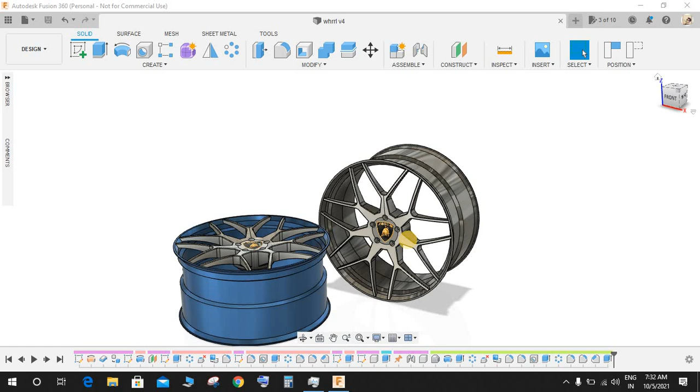In this video tutorial, I will be showing you how to make these beautiful wheels in Fusion 360. Hope you guys will enjoy the video.

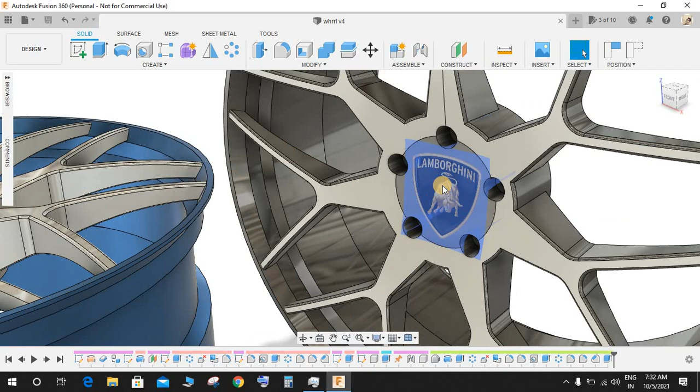Before that, let me make one thing clear: all the dimensions have been assumed, and this is just a practice exercise. I've downloaded a logo, and you can download any logo from Google by typing BMW logo.png or Lamborghini logo.png in PNG format.

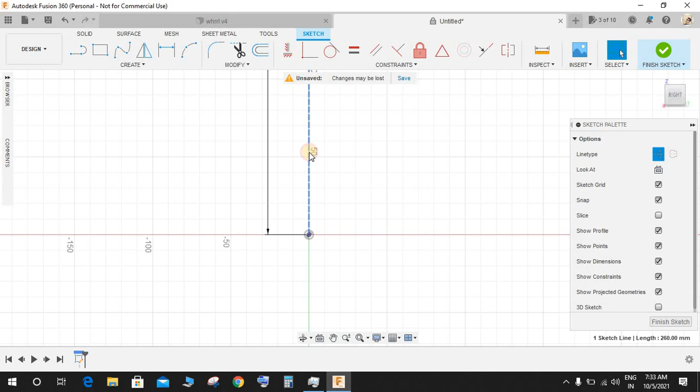Let's get started. Click on front plane and create a sketch. Switch on the construction mode from sketch palette and draw one vertical construction line of 260 mm length like this.

Now press L, switch off the construction mode, and draw one vertical line like this, and from this point another one like this.

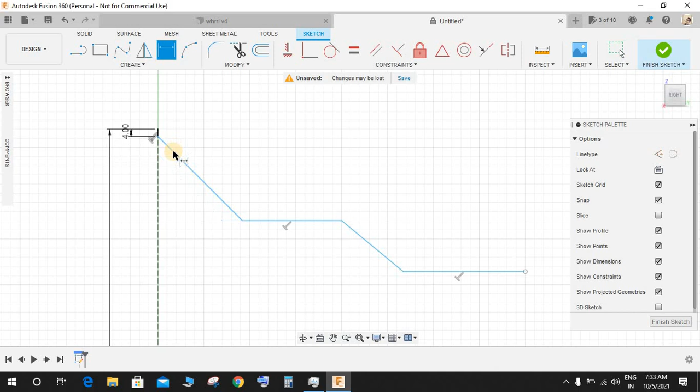Draw this structure, press L for line, press D for dimension, and make this dimension 4 mm. This angle is going to be 60 degrees.

From this point to this point, this dimension is going to be 12. From this point to this point, again 12. This is going to be 20.

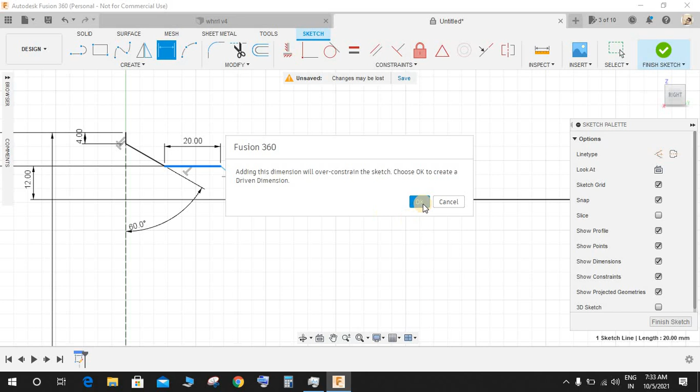For this angle, just delete this, press D again. This angle is going to be 120. This dimension is going to be 80.

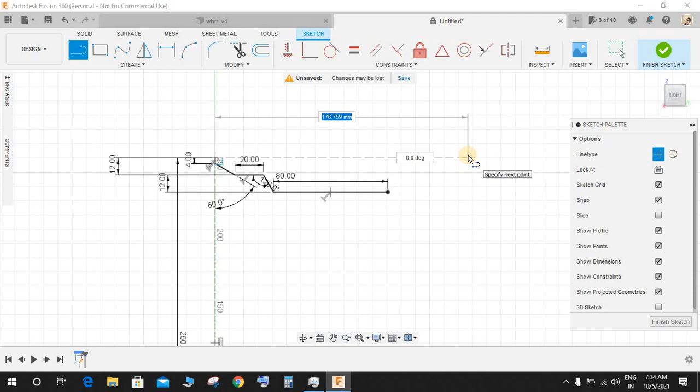Now switch on the construction mode. Draw one horizontal line from the topmost point of distance 250, like this.

Again another one from this point up to the same distance, and again the last one like this.

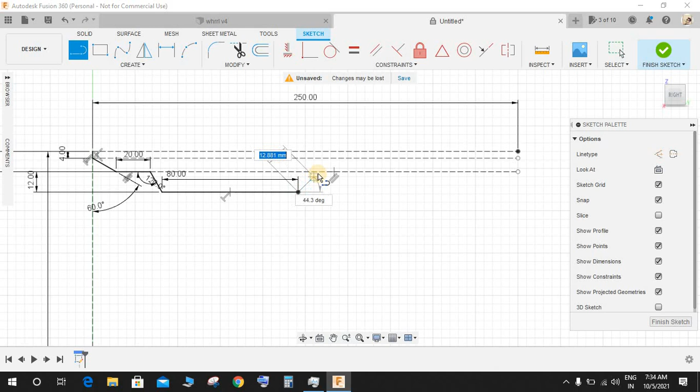Press L again, switch off the construction mode, and draw a similar profile like we did here.

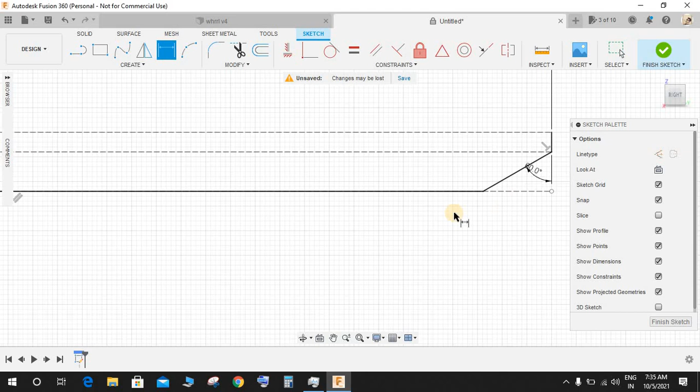Join this and this. Press D for dimension and give this 120 mm, and from this point to this point make it 60, like this. And you are good to go.

Nothing else to be made now, just finish the sketch. Now we have a profile to revolve.

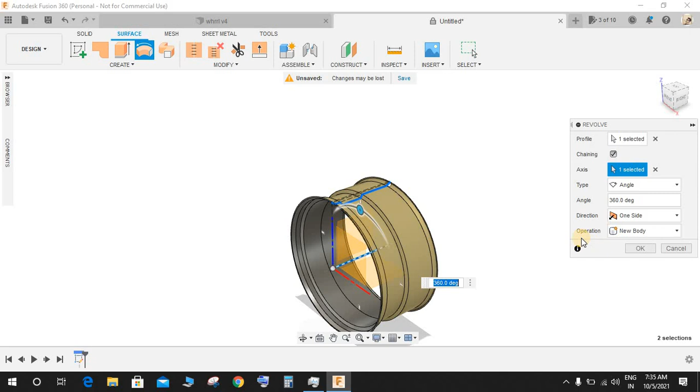Go to surface, go to revolve, select this profile, and the axis would be your axis. Click on new body and press OK.

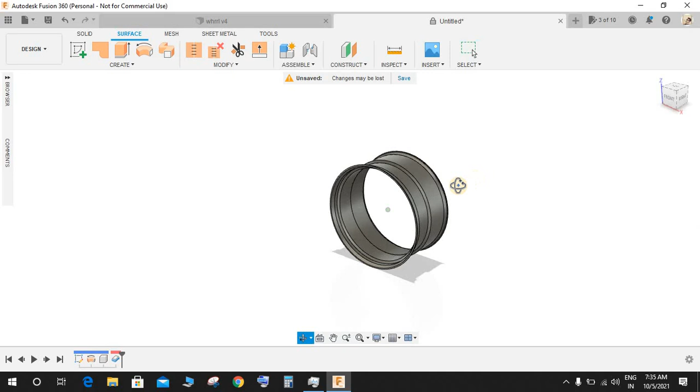Now go to create, go to thicken. It's a surface, so I'm going to make it a solid body. Select all the faces by dragging, click new operation as new component, and the thickness would be inside, with thickness dimension 3 mm. Press OK. Now we have a solid body here.

Now go to create a sketch, and on the front plane we will start by making some sketches. Don't forget to press Shift and N to enable automatic color.

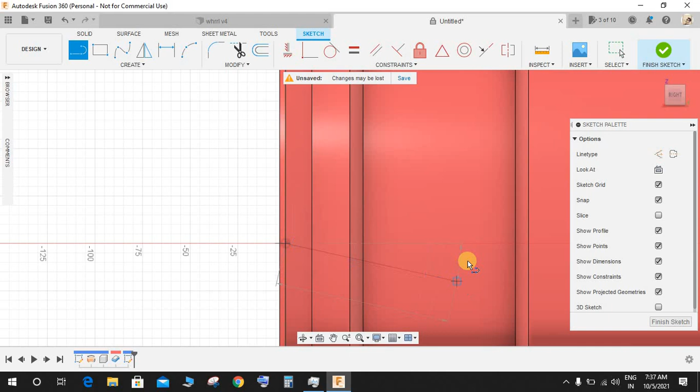For the next step, click on line and from origin draw one vertical and one horizontal construction line right from origin, like this. Now press P for project and select this face and click on body.

Now just hide the component. L for line, join these two, switch off the construction, join two lines.

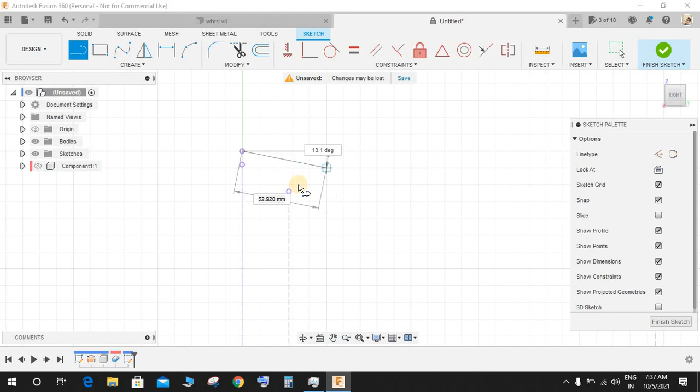I'm going to work on this profile. Oh no, okay, just cancel it.

Press L again, make a line from this point to this point, offset it inwards up to a distance of -3, like this. Beautiful. Now just hide the component for now.

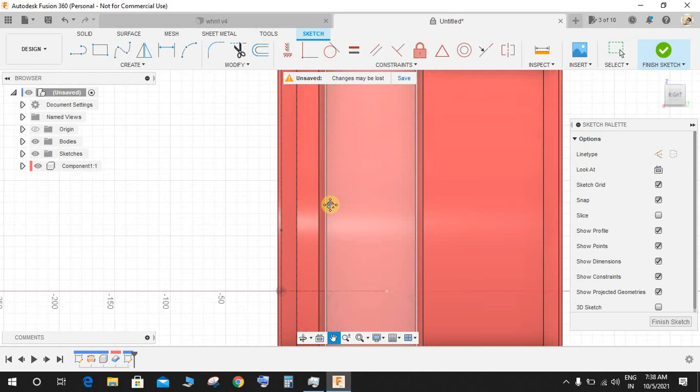I'm going to make some sketch. Start by making a rectangle like this, without having any dimension.

Press D for dimension, and from this point to this point give this a dimension of 15. From origin to this point make this 15 as well.

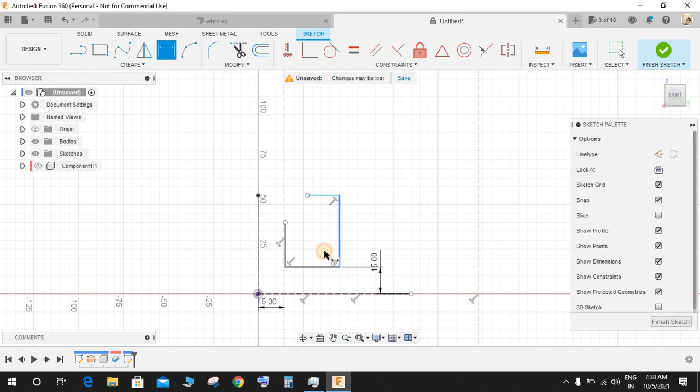Press D again, and from this point to this point this is going to be 70, and from this point to this point this is again going to be 70.

This will be 20 mm, and from this point to this point this height is going to be 50. Now once done, all the sketch has been constrained.

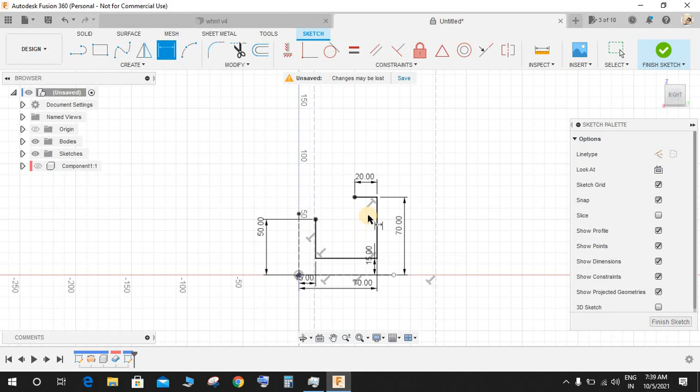What I'm going to do: go to fit point spline, select this offset line from this point and join it like this, and repeat the same step for this point and join it with this, then press OK.

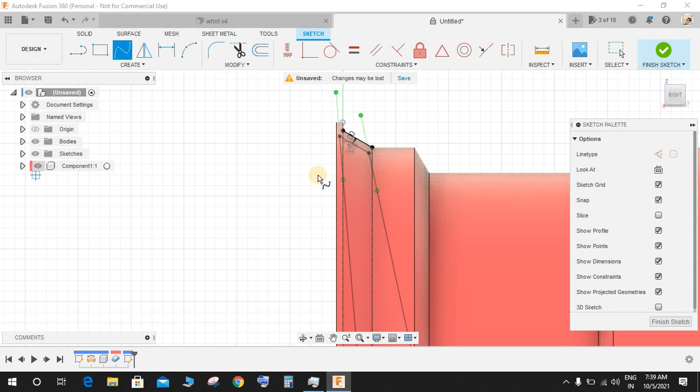Now just bring back the body. This is the control point. Just bring back the bodies, so you can control the tangency of the spline from this point, as you guys can see.

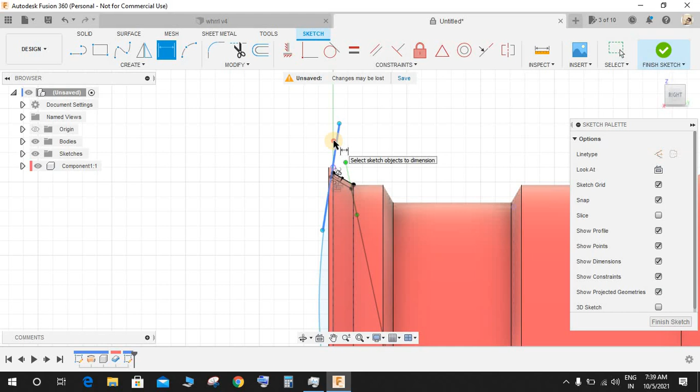For now, press D again, select this point, and press D again, and make this aligned dimension 50 mm, and the angle from vertical, if I zoom it out, is going to be 8 degrees. So we have a constrained profile here.

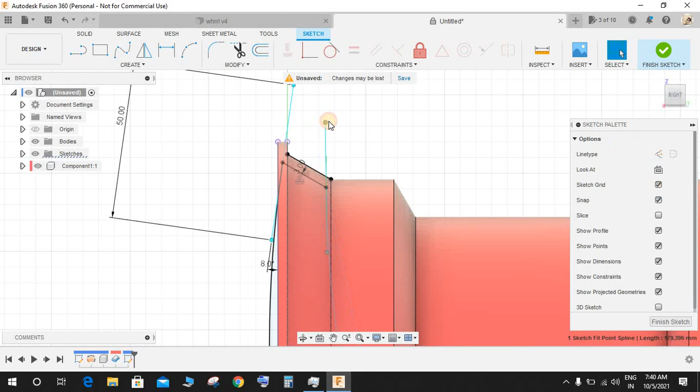Now for this one also, just drag it like this, press D again, and the aligned dimension is going to be 45, and the vertical angle from the vertical profile is going to be 5 degrees.

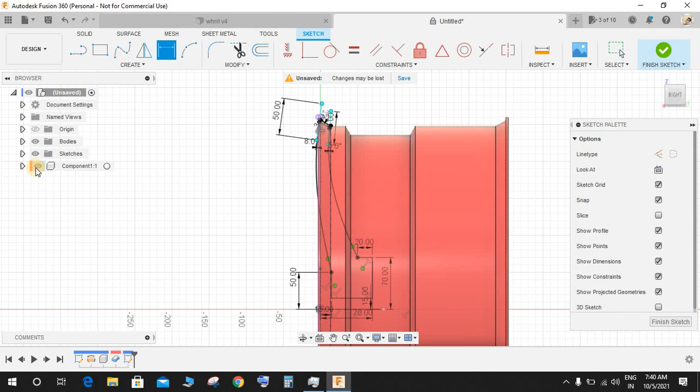Now once done, you don't need to change the tangency of this profile. This is sufficient. Now we have a closed sketch here. Now if I just finish the sketch and go to revolve,

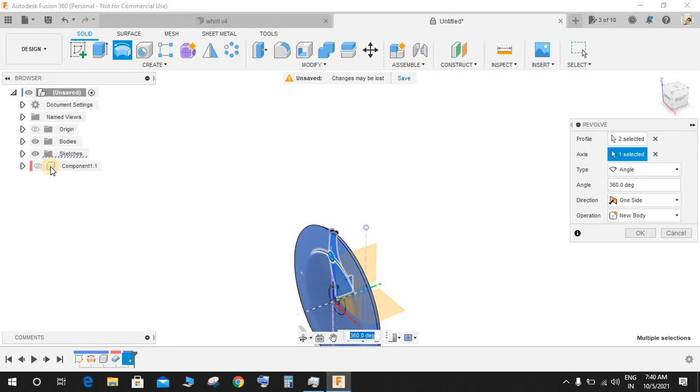select all these profiles that we have just created, and this is going to be our new body. So the axis would be the center one. Make sure it's in the new body, not in the existing component. So we have one body here and another body here. You can just move it like this also.

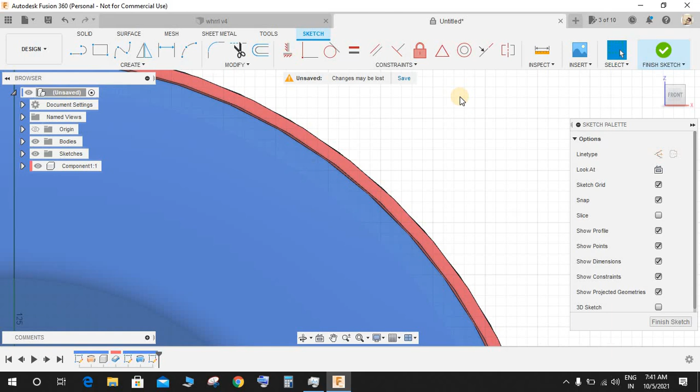So revert back. Now click on create sketch, and on this front plane we will start by creating another sketch. So press P for project and project this inner circle like this. Now you may hide both of these bodies as we don't need them right now.

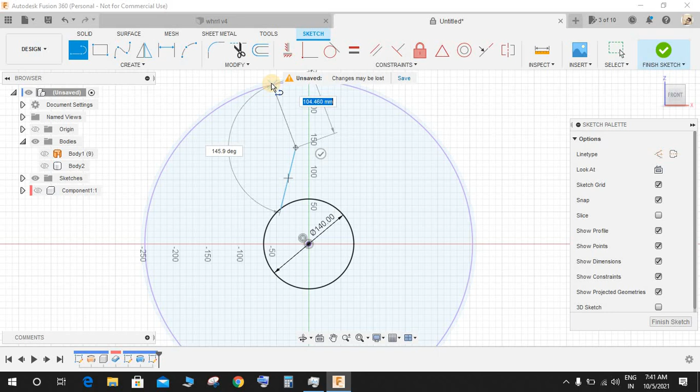So press C again and make a circle of 140 mm diameter, and from this point draw a sketch like this without any dimension. Press D, press L again and draw one vertical line like this. Press D,

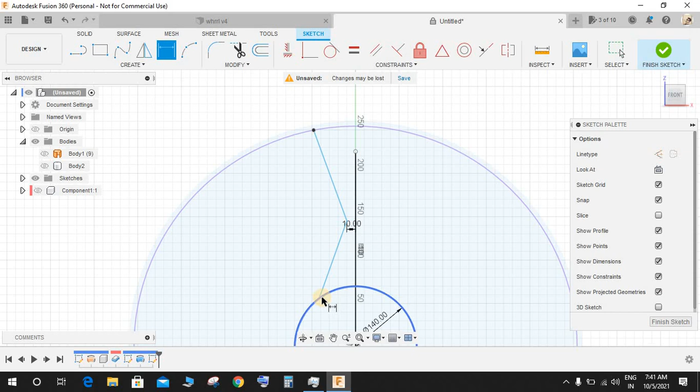and from this point to this point make it a distance of 10 mm. From this point to this vertical line, this dimension is going to be 20 mm, and from this point to this point this dimension is going to be 90 mm. So we have a beautiful sketch here.

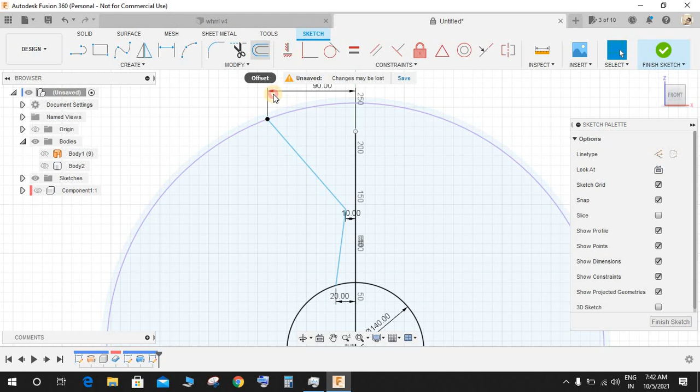Now what I'm going to do is go to offset, select this line, uncheck the chain selection and offset it up to a distance of 10 mm like this. Now fillet this line up to the arc of 15.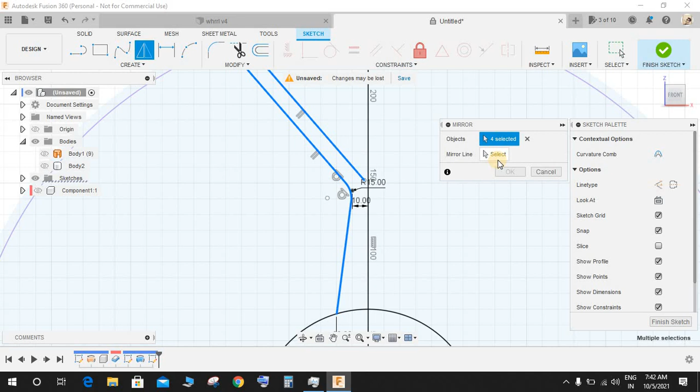Now select this line. Now select all these 4 lines and go to mirror and select the vertical plane as mirror line and press OK. Now fillet again, select this line and this line and make a fillet of 15 again. Now we have a closed sketch here.

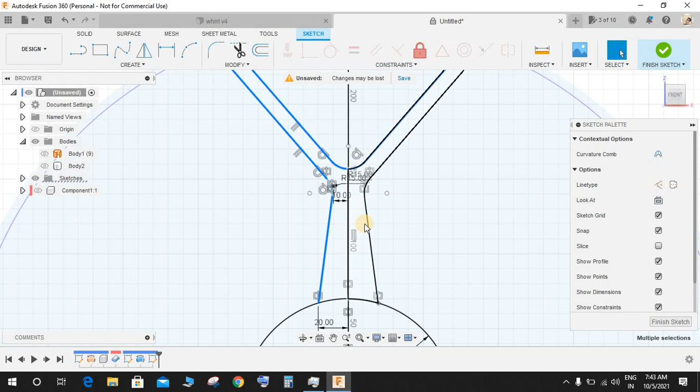Now select all these sketches, all these inner profiles that we have created. Now go to create, go to circular pattern. The center point is going to be this, the quantity is going to be 7, and press OK.

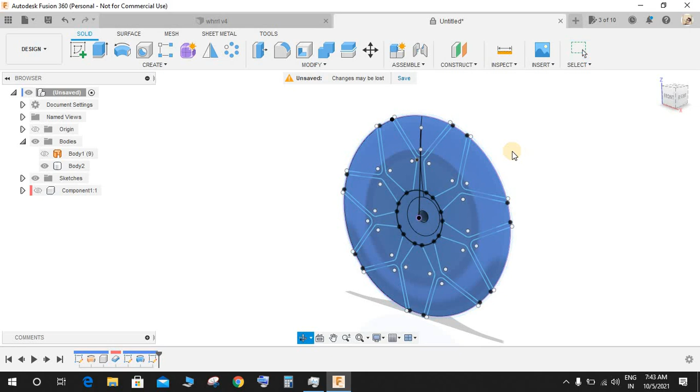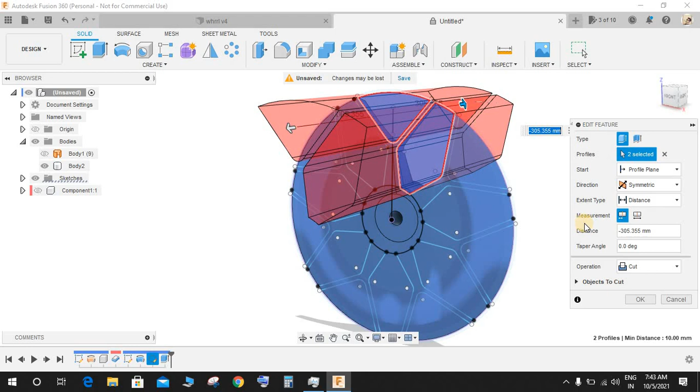Now finish the sketch. Now just bring back the second body that we have created using revolve. Come on, not the first one. Not the first one, just bring back the second body only. Now go to create, go to extrude, select this profile and this profile and make an extrude cut through them and press OK. Just edit the profile and make it symmetric so that it both get cuts equally.

Now again go to circular pattern, go to features, select the type as feature, select this extrude cut and the axis is going to be the center axis. The circular pattern quantity is going to be 7, and we have a sketch here.

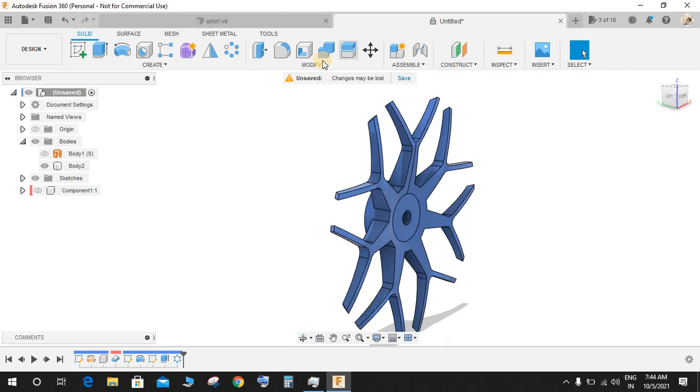Now go to modify, go to simplify, go to remove features. Go to modify, go to simplify, remove faces, select this face and just delete it for now.

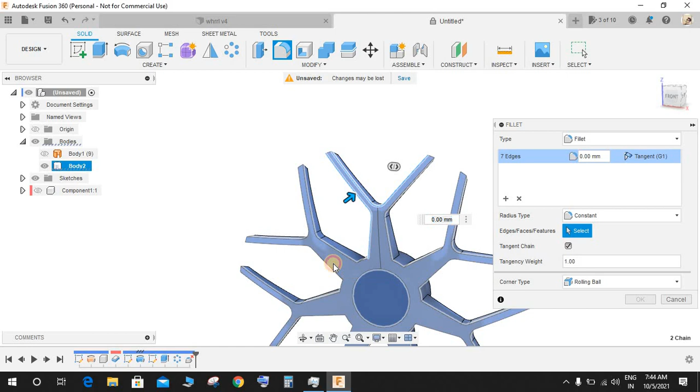Now what I'm going to do is select fillet and select all these edges that require fillet. So you guys can select all the edges that require fillet and give a radius of 2 mm, and wait for your system to respond accordingly. So basically this is just to make the curved edges more smooth. You guys can check that out also. So this is how this will look like.

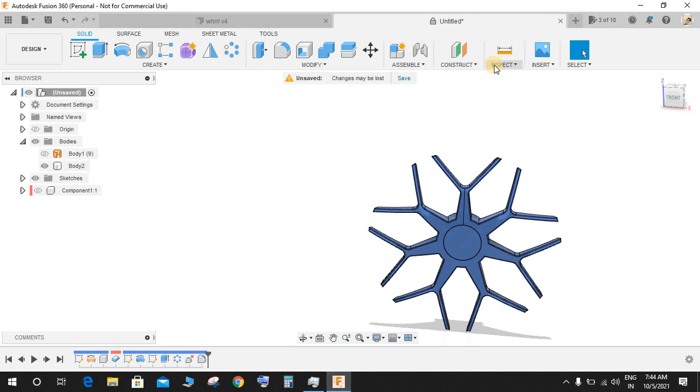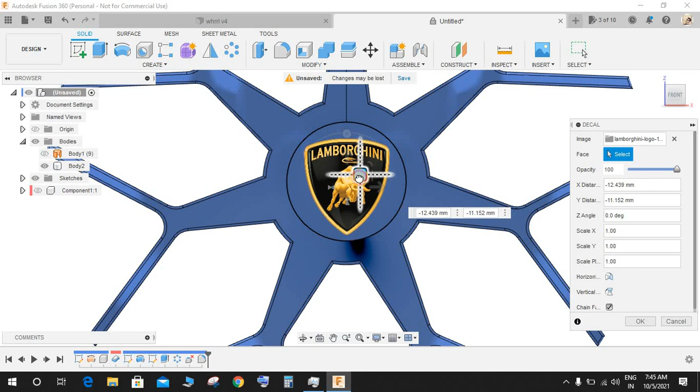Now again go to insert, go to decals, and from my computer I have downloaded this Lamborghini logo. It will ask you about the face, so I'm going to select this face. Now go to front view and I just have to align this according to the size. It is one of the simplest things that you can do, and press OK. So we have a Lamborghini logo on the face.

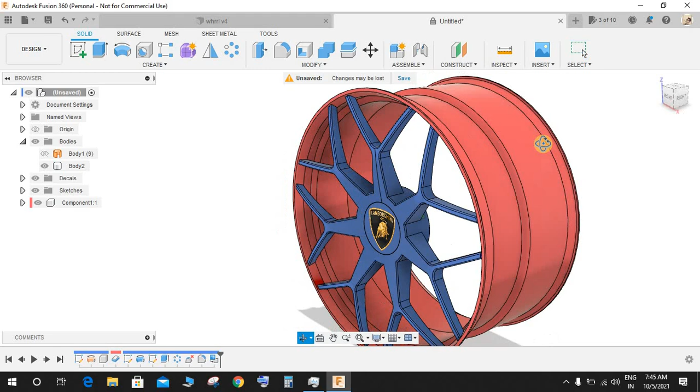Now you guys can just bring back the body, and there are two options. Basically you can keep this in two separate bodies, or you can just click on the combine tool and make them into a single body. For coloring purposes and giving an easier appearance, I prefer not to make them a single body. So I prefer to leave it like this only.